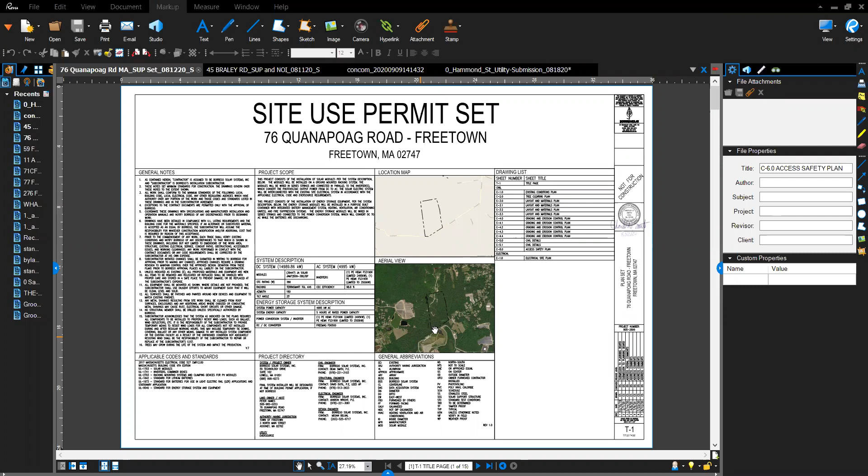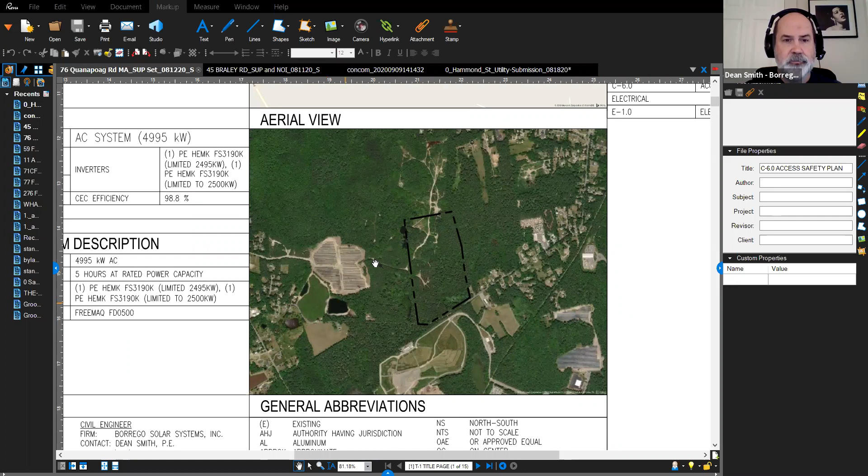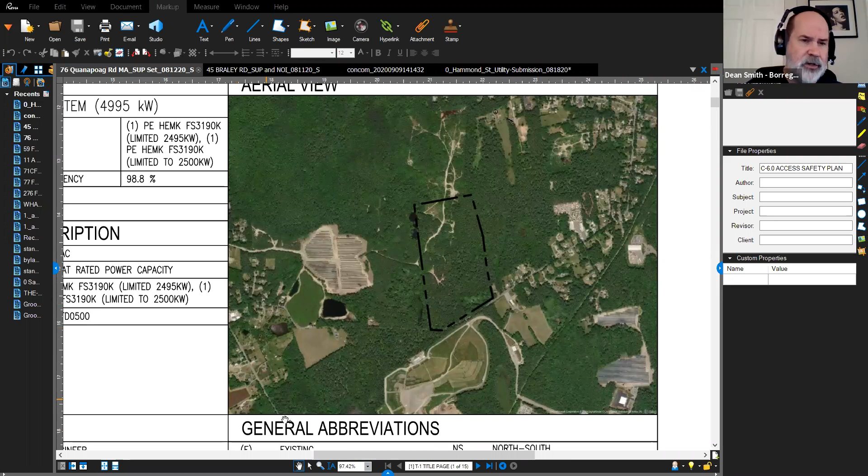As Kevin said, this is out off of Quanapoag Road, out near the landfill out there, actually basically across the street from it. This is the previous system we did out there off of, I forget the address, but it's off this road over here. I can't think of the name right now.

But as far as this application goes with the Conservation Commission, there are a series of wetlands that were delineated by Prime Engineering along the western portion of our site. There's also an off-site wetland that was located by GPS. We are staying out of the 100-foot buffer of all of those wetland systems, so we're not impacting anything within Conservation Commission jurisdiction within that buffer.

The site is largely forested. We're going to be clearing that to build the system. We'll be leaving a vegetated buffer down here along Quanapoag Road, which was increased along the way. We also increased the buffer along the northern perimeter, and we left an additional buffer adjacent to these residences.

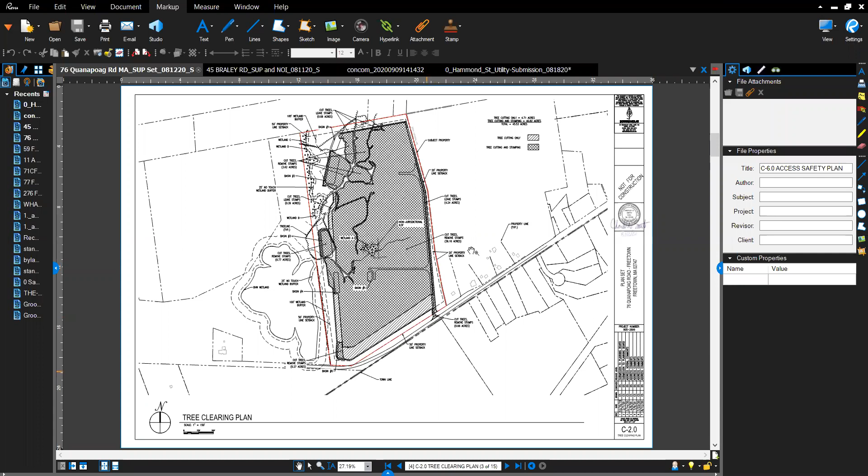We did have a lot of back and forth with Environmental Partners, and we did a series of stormwater calculations to prove that we're meeting the state guidelines. We also made some concessions about safety here to limit the times of operation outside of when school buses are driving by and things like that. There is a safety plan that's part of this set.

And that's really the basics of what we would need to present here before the commission. So I'm here to answer any questions that you might have. Environmental Partners has accepted all of our revisions at this point and given us a clean letter.

Okay, Dean, so you've got your permit through the planning board? The planning board did approve us at a meeting earlier, yes. And I knew that, but I wanted everyone else to hear that. I think one of the reasons we were waiting so long on this is you wanted to get through planning board approval in case there were any changes required, correct? Correct, yes. Okay, and so you're outside the 100-foot buffer zone with the entirety of the project.

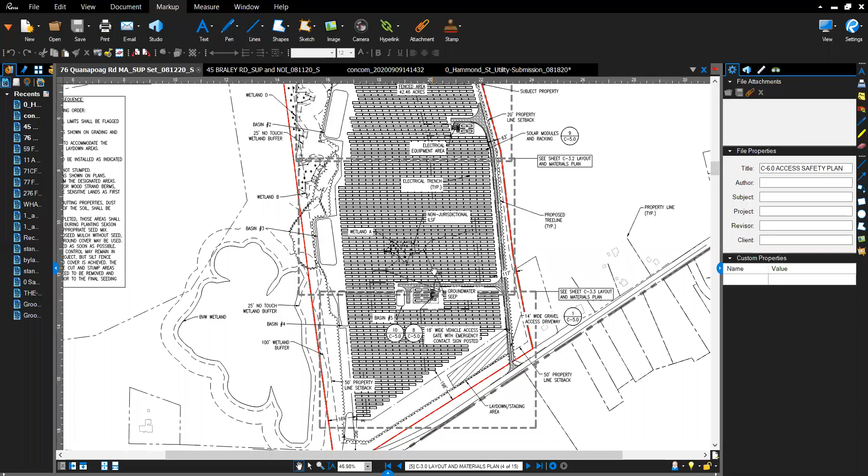And there was one isolated land subject to flooding, but that's through peer review, that's the wetland delineation line A. Through peer review, it's been determined that it's non-jurisdictional and compensatory storage does not need to be provided. That's correct. We did have some additional detailed topography done there and presented calculations showing it's below the thresholds to be jurisdictional.

Okay, hold on a second. Mike, do you have any of the approvals for the RDA? Print it out, you know, that 1, 2, 3 negative determination? Okay, so Dean, you're looking for a negative determination, correct? That's correct, yes. I'm just trying to figure out, there's different subsets of negative determination. Usually it's number 3, but let me look it up unless you know the number you want. I hadn't looked at the numbers to see which was most applicable.

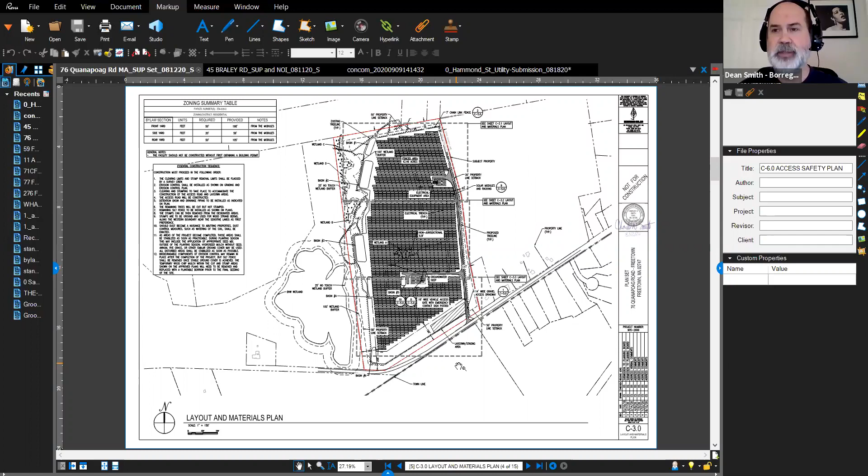Whatever one says that you're not doing any work within a buffer zone. That's pretty much it. And then if anything changes we would need to come back to you. Basically what it is. Yeah, we're looking, I think it's number 2, but we're just going to look it up real quick.

I'd say real quick, but we're waiting on a computer, so that could take a little bit.

Negative determination number 1: the area described in the request is not an area subject to protection under the Act or the buffer zone. So now it's been confirmed that all work is outside the 100 foot, and the area of concern is in fact isolated land subject to flooding, non-jurisdictional.

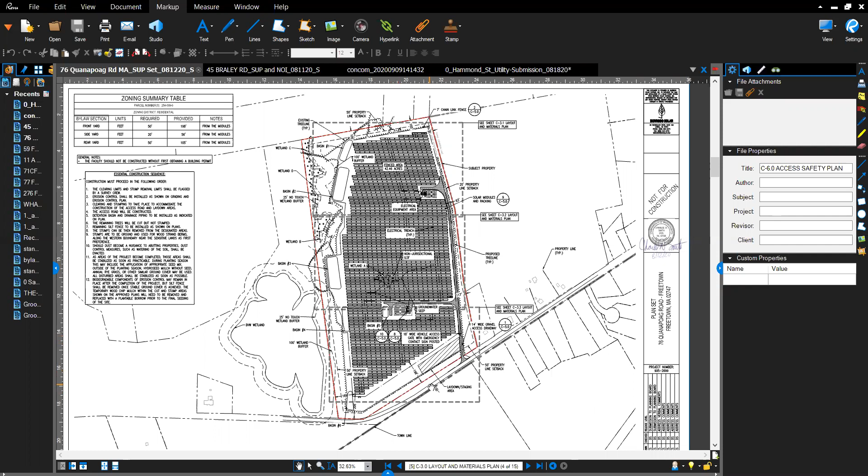This is basically stating that conservation doesn't have any kind of stake in this. So unless there's any questions from any other board members, then I'm good. Go ahead. I just wanted to say, Kevin, I'm good.

Me too. Okay, good. So that being said, I will entertain a motion that we issue a negative determination number 1, that the area is not subject to protection of the Act or within a buffer zone. I'll make that motion. I'll second that. Motion's been made and supported.

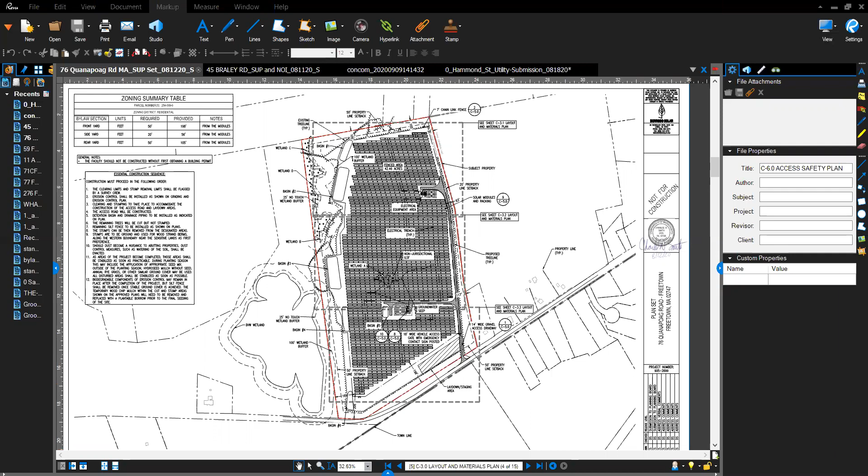There's no further discussion on the motion. I'll do a roll call vote. Charlie Sullivan states aye. Keith Mello states aye. Kevin DeMaris states aye. Motion passes unanimously.

Negative determination has been issued. There is no work being done within a buffer zone or within a wetland. Thank you. You're welcome.

So next on our agenda, I think this is you also, Dean, correct? It is, yes. All right, so I will call back to order.

This is a notice of intent for 45 and 63 Braley Road. This is the construction of a solar energy generating facility. The solar array will occupy about 9.5 acres of land and generate about 0.5 megawatts of AC current.

Dean Smith is the applicant's rep, so I will let you do what you do. Okay, I'll make another brief presentation, share the plan set. So this is our tree clearing plan, Braley Road out here.

There are a number of wetlands on site, which were delineated by Prime Engineering again. There's another small isolated area that falls into the same category as the one on the last project. We had done some detailed topography and presented calculations that showed this was a non-jurisdictional area as well.

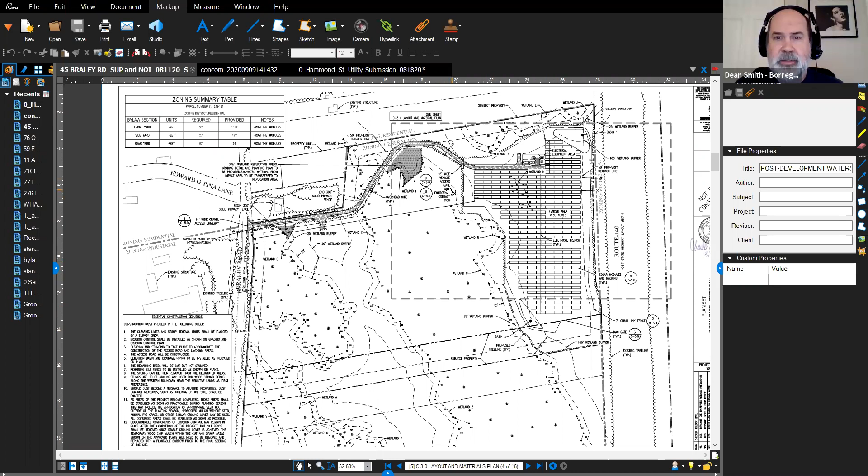As far as screening for the project, well, that's not really a conservation issue. No, we're going to stick to conservation issues. Yes. So I don't know if there's anything else I would need to discuss with the commission. I'm happy to answer any questions that the members might have.

Again, I have some familiarity with this because I've seen it with the planning board. One of our concerns was the wetland crossing, and thank you for increasing the ratio of replication. I see it's 3.5 to 1.

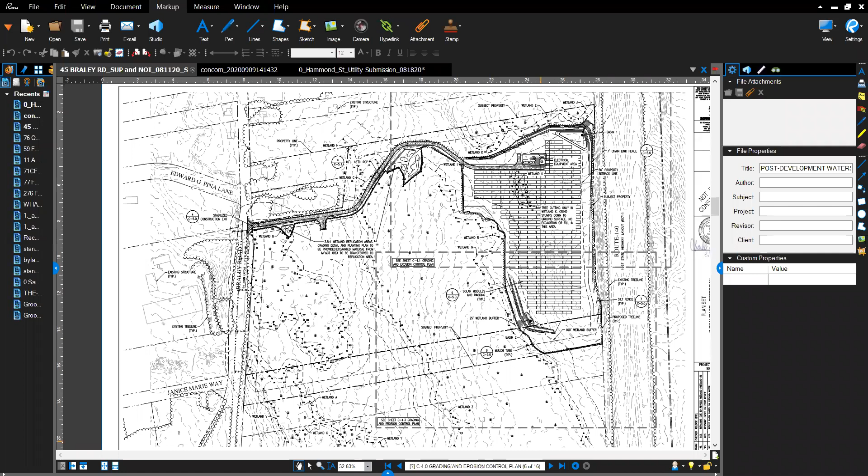Yeah, it's a little more than 3.5. The environmental partners calculated it at 3.6, but it's a significant ratio, and we do have a full mitigation plan as part of this set.

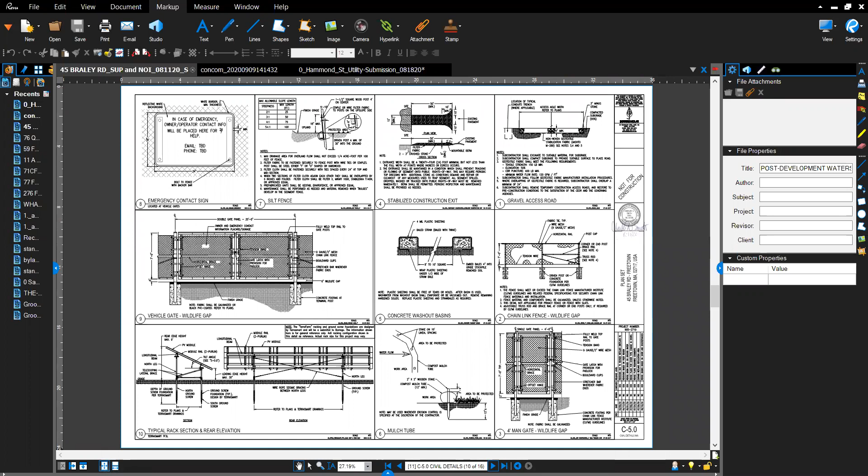I'm just getting back to that sheet. And typically, Dean, we have oversight when there is professional oversight, when there's replication, particularly the size that's going to be done. So we would continue on with environmental partners group, whether they send Brooke or somebody else down there.

So before we would issue a certificate of compliance on this, we'd like to see that there would be significant plant life, and we'd like to see that it's taking to the area, if you will.

Sure. Now, we'll give a little bit of advice. We're not professionals here, but I can tell you what's worked well. We've talked about it a little bit before, but I'll state it again. Typically, what we like to see on a replication is you would excavate the area to be replicated to the elevation that you want.

You would go and get the wetland muck, the wetland material and soils, bring that from the area to be filled, and put it into the area where it's supposed to be replicated, rather than bringing in hydric soils and organic material that often take years to grow back and acclimate. This way the soils have the same balance, the same tubers and roots, pH and alkalinity. All that stuff is the same, and we've had very good success.

So we can't force you to do it that way. You just need to show the end result is a replication area that's viable, with at least 70 to 80% viability after a couple of growing seasons. We've found that if you utilize this methodology, one growing season typically gets you to where you need to be. So just keep that in mind going forward.

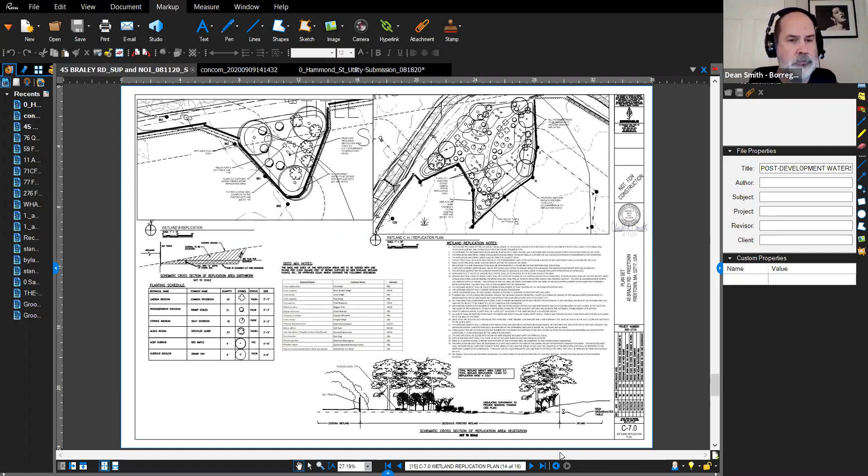Perfect. So other than that, most of it is outside the buffer zone. There's a few encroachments, obviously the access road getting in, but more importantly the electrical equipment is not within a buffer zone or near the wetlands. The reality is solar, at the end of the day once construction is over, has very low impact on the environment while it's running. So there's not really a concern about pollution or runoff once construction is over. You have a robust soil erosion plan, and I know you've got siltation barriers around.

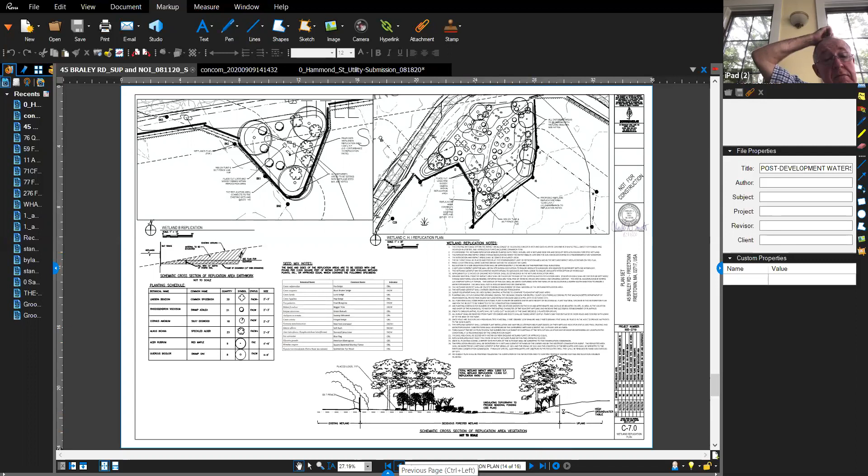All right, is there anybody here from the general public that has any questions? Okay, if there isn't, I'd like to entertain a motion that we close the public hearing. I'll make that motion. I'll second it. Motion made and supported to close the public hearing for 45 and 63 Braley Road solar facility.

Any further discussion? Hearing none. All those in favor signify by saying aye. Roll call: Charlie Sullivan, aye. Charlie Sullivan states aye. Keith Mello, aye. Keith Mello states aye. Kevin DeMaris states aye. Motion carries.

All right gentlemen, I don't know if you've had a chance to look at the plan, but there is significant wetland, though they're doing their best to stay out of it. Appreciate the fact that they didn't try to wedge more solar into that strip of upland toward the front. At the end of the day, after peer review, Environmental Partners has done their review on this and we've gotten a positive review from them relative to the stormwater management and how they're treating it. In addition, they are offering a much higher ratio for the replication, so again, do appreciate that.

If there's no other questions, I would entertain a motion that we approve the plans as submitted, with a condition that Environmental Partners Group, prior to us signing off on the project or giving a certificate of compliance, would review and inspect the replication and give us a letter, and that we would not issue a certificate until we get a positive review from our Environmental Partners Group.

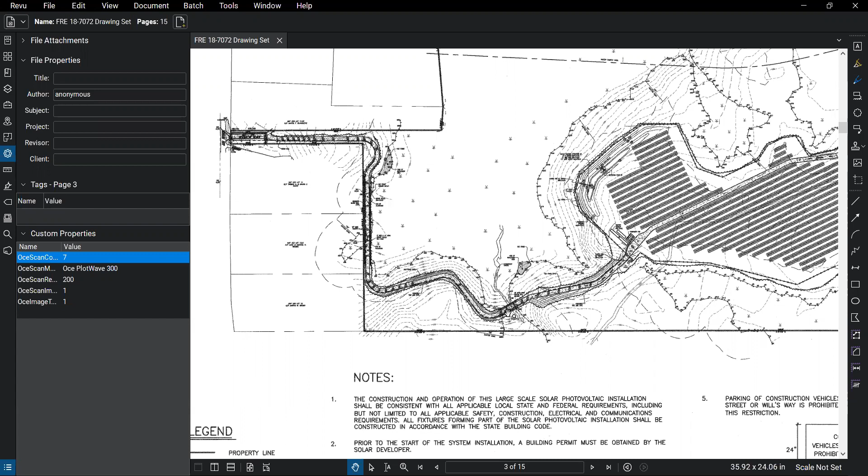The idea is to bring the gravel drive into the project, minimize the wetland alteration by hugging the boundary line here, and then going across a narrowest band of wetlands in the midsection of the site, before it opens up to the main part of the site in the middle. The wetlands line is this area here along the outer edge, comes up into here and down.

You'll notice that most of the modules for the solar are actually outside the 100-foot buffer zone. Here's the 100-foot buffer zone running along here and then out around in this location. So again, we've placed the main alteration outside of the buffer zone with the exception of the access points.

And then the access continues through the site, another wetland crossing here, and then into the back section of the upland portion of the site.

We actually were originally thinking of putting solar in this corner of the site, but with some soil testing, it's got some unusual ledge and topographic features. So we're going to preserve a fairly large area of upland in the back corner of the site as part of the project, and we'll focus the solar in the back to this lower, flatter area where there is some wetlands beyond the site.

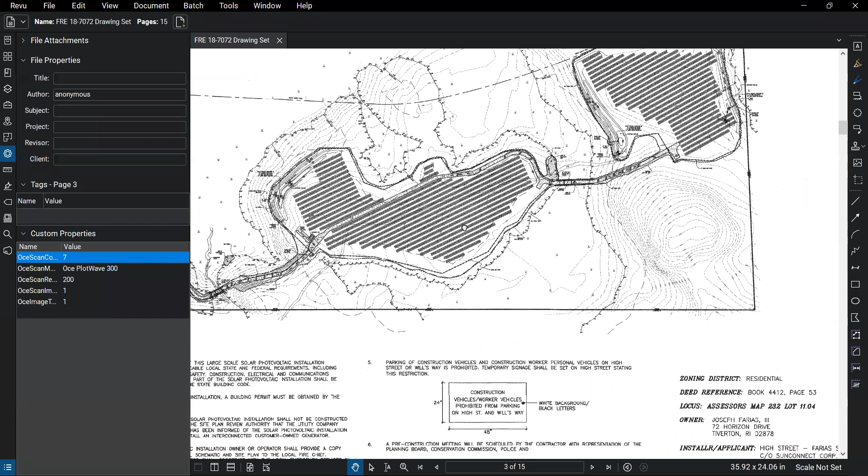Again, we've kept the modules and the bulk of the work outside the 100-foot buffer zone. As I indicated, there are crossings required to get the access into this section of the site, and also this initial crossing. We have utilized the DEP stormwater regulations for stream crossings, so we are minimizing the alteration of the wetlands. There are stormwater management systems proposed for the project.

We have a berm detention area here, maintaining the natural topography down to this collection point. And then we have two in the back, one in this area here, where we're doing a similar type system with a berm, a collection point, and a discharge. Again, keeping the discharge almost 100 feet from the wetlands.

On the first one that we pointed out, it's probably about 200 feet from the wetlands. And then we have a third, smaller control point here in the back with a small discharge. Again, I think we're about 50 feet or so from the wetlands at the point of discharge.

The project does require replication. We have a little over 5,000 square feet of replication proposed for the project, split into a couple of different areas here, and near the entry point here. Again, we tried to set the replication close to where the actual crossings were occurring, so we're replacing wetlands near the wetlands that we are altering.

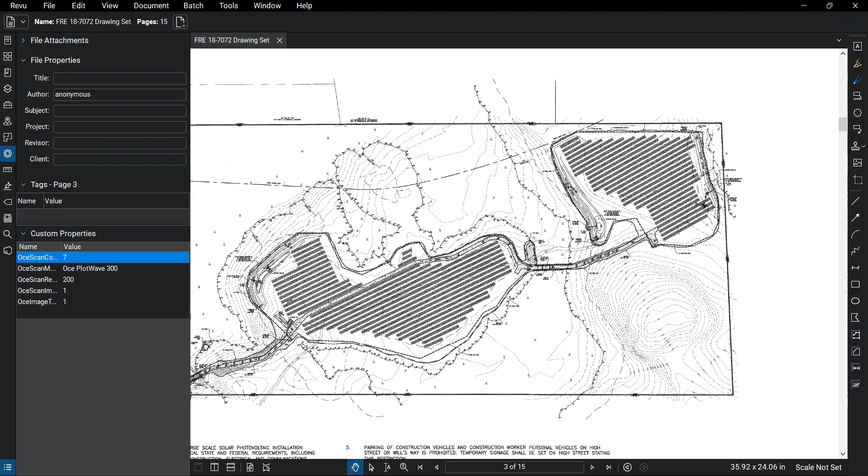And your replication area is going to be over 5,000 square feet. That's correct. And you're doing that in multiple locations? Yes. We've got a crossing here, so we have replication here. We have a crossing here, we have replication here, and we have a little bit of nicking of the wetlands here, and we have a replication here. So yes, it's in 3 separate locations. Which is nice to see that you're replicating in an area close to where you're actually impacting.

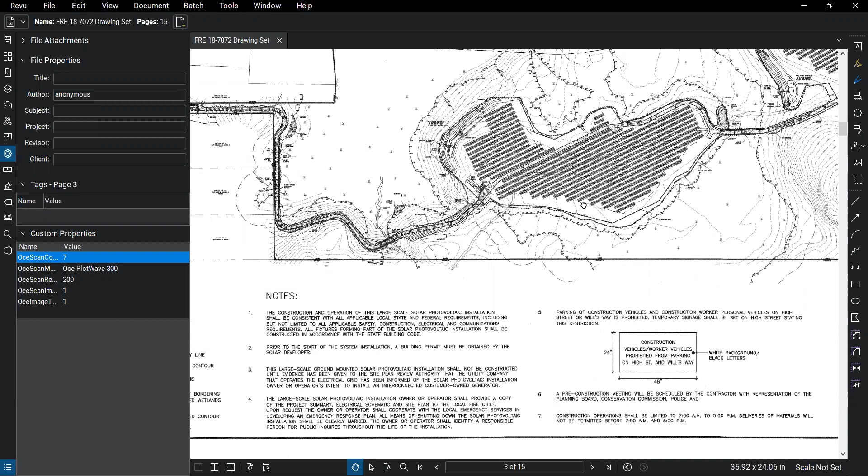So, yeah, again, EPG reviewed this for all stormwater management, all that. They did a review. We asked them to review for both conservation perspective and for the planning. And it's usually the stormwater management that you deal with Concom. And you did get a clean bill of health and sign off from EPG on that. So like the previous project, we typically have somebody from EPG or an outside consultant go over there to make sure that the wetland replication is where it's supposed to be, what it's supposed to be, and it's actually taking before we sign on a certificate of compliance. So just so you understand that's how we typically do it going forward. Okay, that makes sense.

Does anybody have any questions from the board or from the general public? I'm good, Kevin. Okay, excellent. I'm good, Kevin.

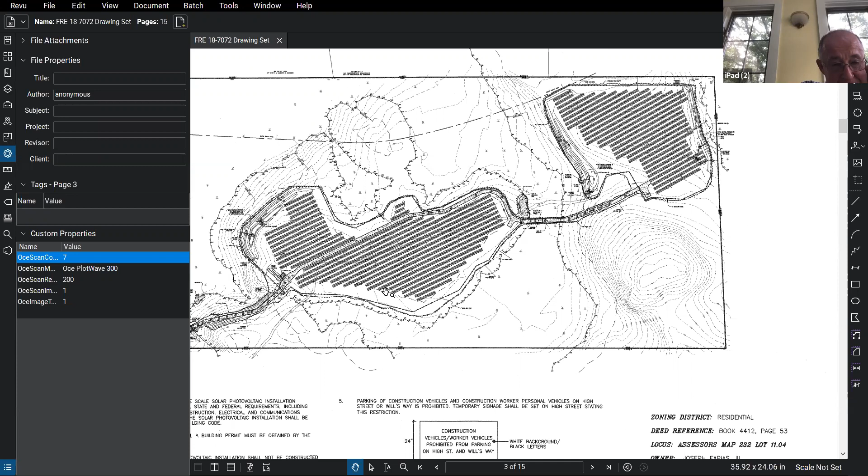That being said, then, I will entertain a motion to close the public hearing. So moved. I'll second it. Motion's made to close the public hearing. All in favor signify by saying aye. Roll call. Keith Mello states aye. Charlie Sullivan states aye. Kevin Damaris states aye. Motion carries unanimous.

I know we keep using the word straightforward, but maybe it's just because we've seen so many over the years. I'm confident in the project and its success given the rigor and the amount of oversight that Environmental Partners has done on this. And I can appreciate the fact that we're getting a significant amount of replication area back too.

So with that being said, I will entertain a motion that we approve the plans as submitted with the condition that we receive a letter from Environmental Partners or a peer review relative to the success of the replication areas. I'll make that motion. I'll second that motion. Motion's been made and supported. Any further discussion on the motion? Hearing none, all those in favor signify by saying aye. Roll call vote: Charlie Sullivan, aye. Keith Mello, aye. Kevin Damaris states aye. Motion carries unanimous.

Very good. Okay, thank you very much, gentlemen. Yes, thank you, sir, and have a good night. All right, you too now. Take care. Yep, bye-bye now.